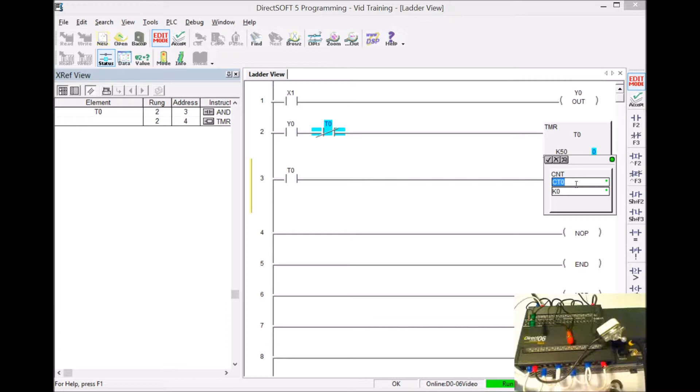Now let's count the number of times that our timer has timed out. So I'm going to take T0 again, this time with a normally open contact, T0, and I'm going to add a counter. CNT is counter. It's going to be counter number 0, that's the name of the counter, and we'll let it count to 5.

The second rung is the reset for the counter, because if you didn't have a reset, the counter would just keep counting. It has to know when to reset back to 0. So I'm going to reset it.

I'm going to reset the counter when we turn our switch, input number 1, off. So I'm going to again use the normally closed contact, X1, so that when we turn our switch off, it'll reset that counter.

And then when we've counted to 5, let's go ahead and turn on our amber light. So I put in another normally open contact, label it CT0, that's the name of this counter here, and just turn on Y1, our amber light.

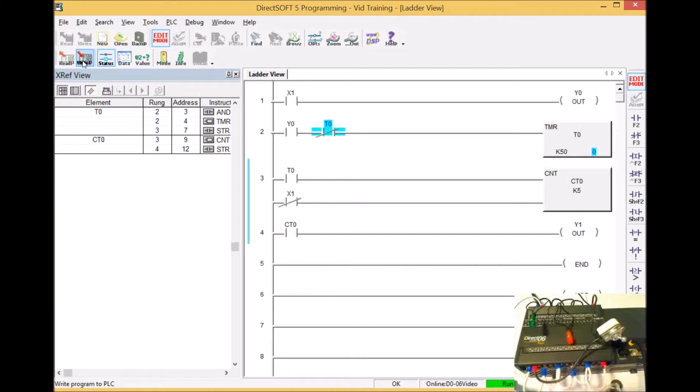So if we accept this program, write it to disk, write it to the PLC, and now let's test it and see what happens.

So I'm going to turn my switch on. The green light comes on. The timer's timing. Each time it times to 5 seconds, it starts the counter. It increments the counter. So we've got 2,

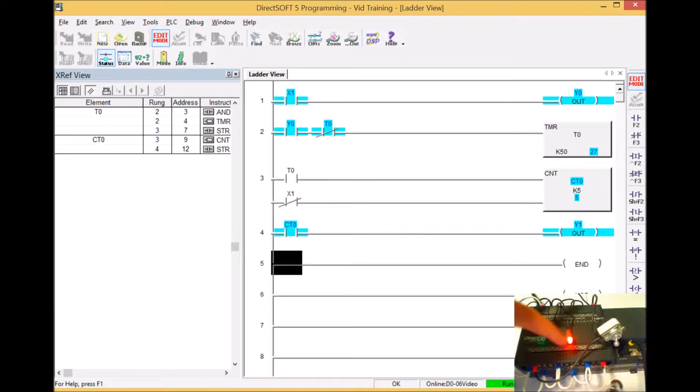3. When it gets to 5, I'm hoping the amber light will come on. There it is. So it got to 5. Our amber light came on over here on the screen. This line is made. So now the timer, you'll notice, just keeps timing. It keeps going around and around and around, and the counter keeps counting. That doesn't hurt anything because we've already made our logic.

So now if I turn that switch off, everything resets.

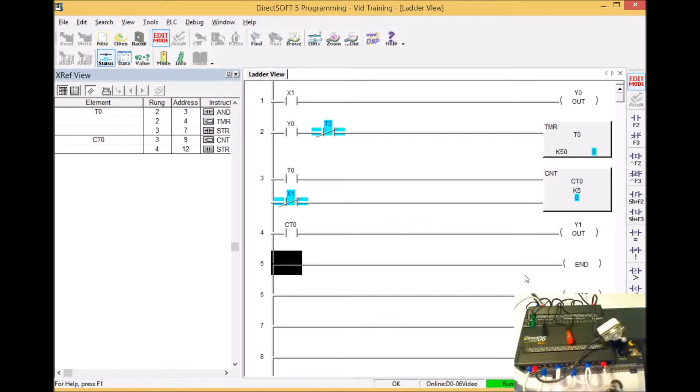So we'll add one more thing to the program. We'll stop that timer from timing after the counter counts out. So again, I go with a normally closed contact because we want to stop this when this action happens, and call that CT0.

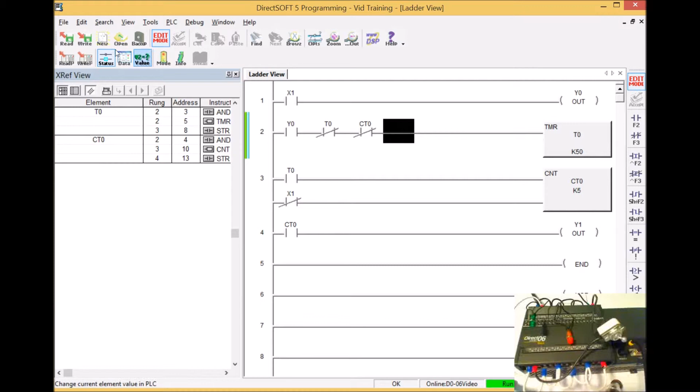I'm going to accept the program, write it to disk, write it to the PLC, and then we'll test it out.

So everything's starting to time out again. The green light is on. You also see the indicator lights on the PLC are on.

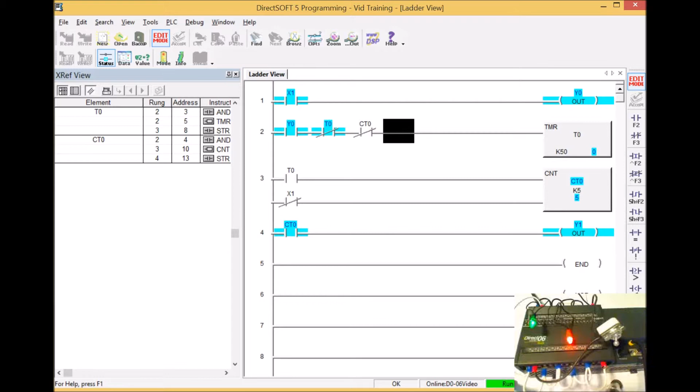So I'm hoping when we get to a count of 5 that the counter is counted out and the timer will stop timing. So there it is. The green light's on, the amber light's on, the timer stopped timing, the counter stopped counting, and we can reset it by turning the switch off.

Let's do a little program cleanup now. I'm going to highlight X1, and then I'm going to hold down my control key and hit D. And this allows me to label the items of the program with English. So let's call X1, I'm going to give it a nickname of switch.

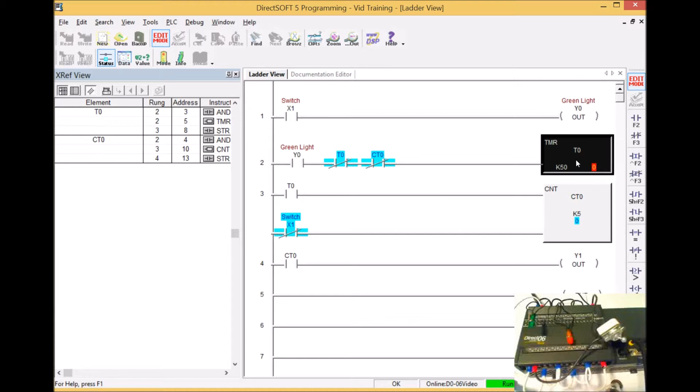If I go back to ladder view, I can see that it now says switch. I'm going to do Control D again, and I'm going to call this one green light. We'll call the timer green light timer. I'm going to do it with a Control D. We'll call it GL timer.

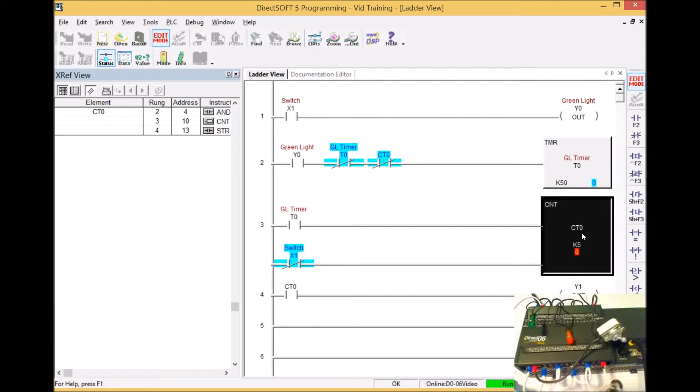Then we'll call this the green light counter. So Control D again. Back to ladder view. And then this is the amber light.

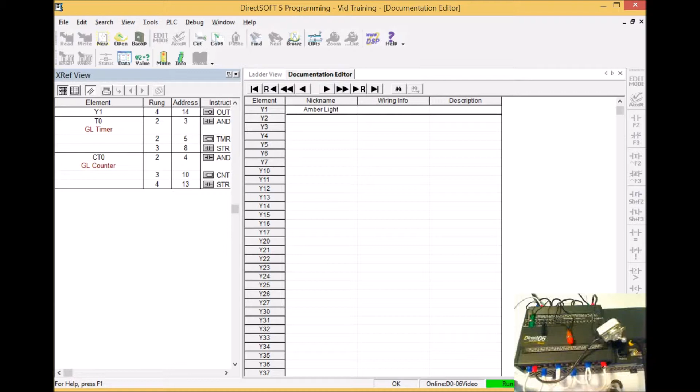So now our program is a little bit easier to read, especially if you get into a real big program. You have 1,000 lines with hundreds of inputs and outputs. Yeah, you have to get them labeled so you know what they are.

The other thing this does for us is by using the nickname, I can actually use the nickname instead of X1 or Y0. So I'll show you how we do that.

So let's say I was just putting in another normally open contact, F2. I have to be in edit mode, F2. If I type switch, it automatically gives it the X1. So that's why it's called the nickname.

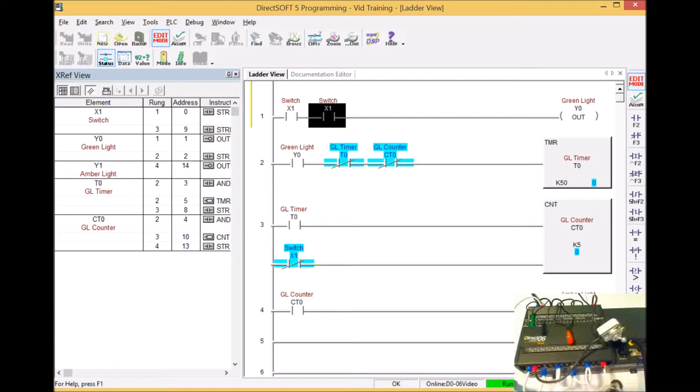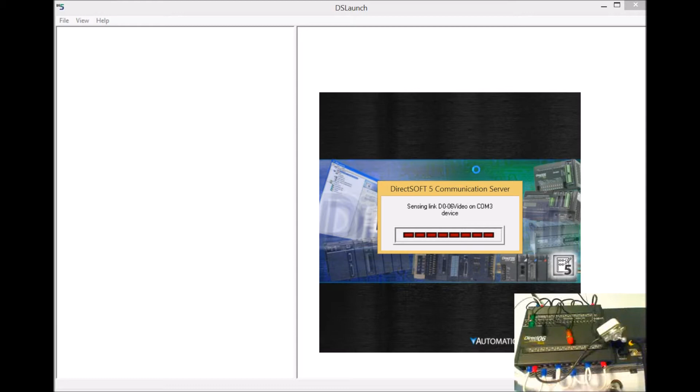So we've completed our first program. Let's go ahead and close out DirectSoft 5. And then let's open it back up. Come down here to our link.

It takes a few moments to connect to the PLC. And what I'm going to show you is what happens if you open it now from the link instead of opening the program from the project file. You just have to let this open.

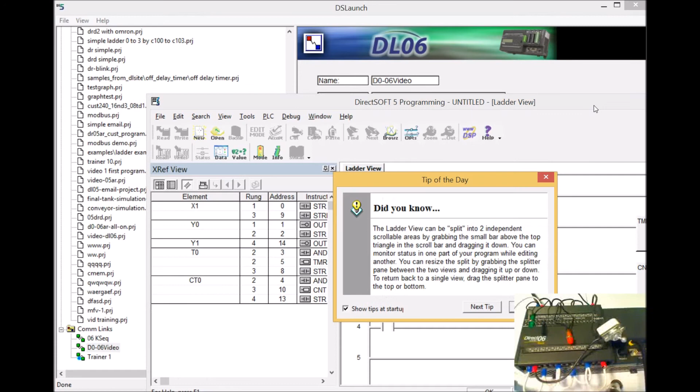So here's our PLC, and there's our programming. But you may have noticed that the English descriptions have disappeared. The program is working fine. If I go to, I'm in program mode right now.

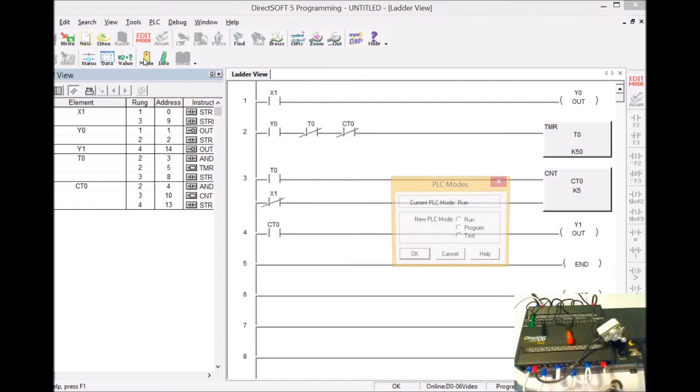To change to run mode, I come up here, select run, monitor the status. And we can see the program's working fine, but it's missing all the English descriptions.

And that's because those descriptions are not stored on the PLC itself. So when I opened this program up by using the COM link by itself, it's just read the program right off the PLC, which contains none of the English descriptions.

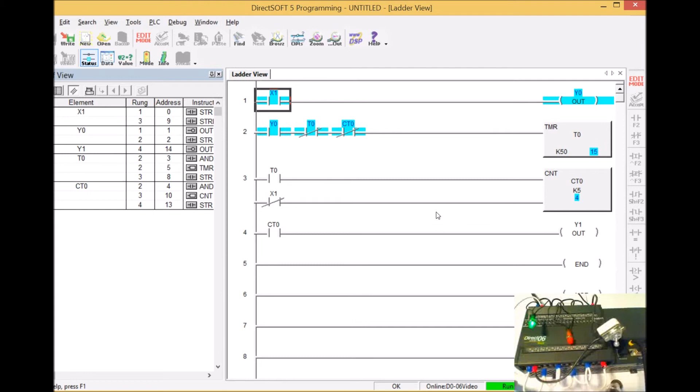So let's close it back out. And then this time, let's open it from the project file, which we called vid training project. And now I've got all my English descriptions.

So after you've added nicknames and descriptions in your program, you need to open that program from the project file, not from the COM link. The project file is automatically associated with the COM link. So you can't erase your COM link, you've got to keep that, but everything will work fine.

So we've created our first program and looked at some of the information here on the menu. So you know the edit mode, the status, and how to change the mode of the PLC. The only other thing I think you might want to be able to do early on is to be able to clear a PLC program, and you do that by going to PLC and clear memory.